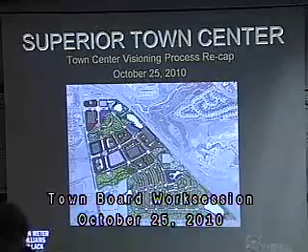I guess I'll be speaking over here to my right. This is where we left off with this master plan and vision, and I'll go through a little bit for the new members, and also a refresher for the existing folks on the board, on how we reached that. Cheney Ferguson originally was my project manager. She's still around, soon to be a new mom, so I'll be losing her for a while, but I'll get her back. So next slide, please.

When we started this vision, we worked with the board to take a very complex subject matter and try to make it simple. Part of that is really identifying overarching principles for the project, things we talk about as must-haves. That became a filter for all of our decision-making when we created alternatives and showed ideas - were we solving these big four principles, basically connectivity, which means are we connecting to the town at large?

Are we connecting where places are disconnected? Connectivity really is talking about ease of movement. Movement, whether you're on foot, in a car, on a bicycle, or on a skateboard - how easy can you move around?

A mix of uses - typically when you're talking about urbanism, you think of mixed use as something vertically integrated. Well, it's not just that. It's actually horizontally integrated, uses that are in close proximity. Proximity is the key point here, that you have different uses you can move among without necessarily having to use the automobile. In other words, you can walk, bicycle, again, the skateboard.

Placemaking - okay, that's the hardest one to get your arms around. But placemaking really is where you create a semblance of an environment that is the town of Superior. When you think of Boulder, you probably think of Pearl Street. There are probably about 4 places in Denver you immediately think of when you talk about placemaking that have unique characteristics of that certain place. What's interesting about Superior, what we discovered, is it has unique placemaking tools, basically because you have such a fabulous view of not just the front range of our mountains, but also further back towards the Indian Peaks, that gives it certain placemaking features.

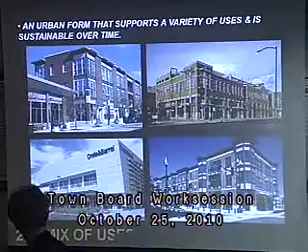Mix of uses, it can be office over retail, like at Stapleton. Or the upper right, you'll see offices that are mixed around a joint parking structure, a joint use parking structure downtown off Pearl Street. The lower right is housing over retail. It's a variety of uses that are coming together in proximity.

So it's more about what we call as urban designers, it's more about the form of a place. I've got to use my hands because I'm not drawing, but you start creating sense of enclosure. You think this is a building, that's a building, there's a street in between. It's that sense of enclosure, and it's not so much about the uses of those buildings, but it's more about the form of how they create those great streets. And that's where you get right back into that placemaking. So these four principles are all actually interrelated all the way through in this type of thinking. Next slide, please.

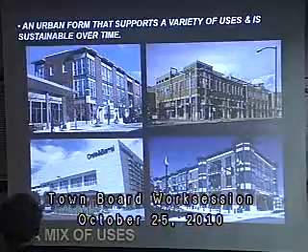Placemaking, we call it dense and compact. You tend to take both those terms as negatives, but that's what brings people together. That's where you get a certain mass of people together that can have interchanges, and those interchanges are social, and they can be economic, and quite honestly, they can be entertainment.

And that's what we have down on Pearl Street again, to use Boulder for example - a critical mass of people that come together just to watch people, and all of a sudden that creates that placemaking. It creates that social network, and it certainly creates an economic formula for the town. The Main Street's going to be a big issue here, and we'll keep talking about that. But it's going to be a main form of creating that place. It's that third place where people can gather.

And what we've heard more in our initial talks was, where do we come together here as a town? Where is our gathering place? Is it the marketplace? Is it your original town? Where does that really come together? And where can you actually do celebrations? Where does somebody out of town say, I'll just meet you there? Where is that there? And we keep hearing, well, we need to create where's the there?

We need to create that place that gets down to the last one about the great streets. And again, when you think about great cities, you always come back to a street - 16th Street Mall in Denver, Pearl Street in Boulder, and we can go on and on. There's always that place that tends to be a gathering spot for a local community. Next slide, please.

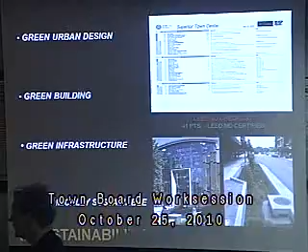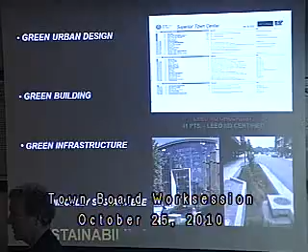All we're doing is this great change of how we build over time, and the industry is picking that up. And it'd be great if it could be more of a carrot to do that, but unfortunately our building industry and our policymaking industry really move slowly, so it takes a bit of a stick. And the stick is requiring LEED buildings. It's a great tool, but I think in about five years it'll be our standard of practice. And what that means is not just about buildings, but really the big piece here is about infrastructure, how we handle water and water quality. Here we are in our high, dry state of Colorado.

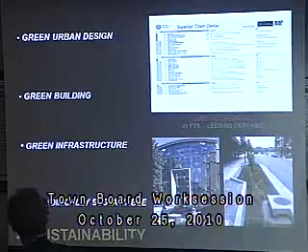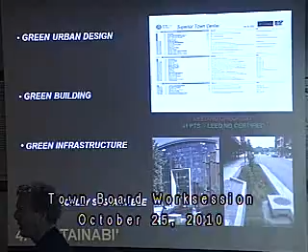What's really germane about this specific site is you have such a wonderful amenity in the creek that passes through the site, and you want to protect that. You want to engage it, because right now it's still a bit of a backwater. But how do you keep it as a great amenity, which gets down to economic sustainability, so the place can transform and transcend over time and still be a viable economic mechanism for the city and to itself.

We'll quickly go through the site process we went through. We've got McCaslin, we've got the local network around there, so we're starting to define the town center site here.

I'm talking about enclosure on a more mega scale. Certainly nobody in their right mind should be walking or trying to cross 36. But there's no reason McCaslin has to be the way it is. We talked about this at length last time.

Part of that is you have the original town. Did I get that right finally? Yes, three years ago I think I stumbled through that for about a year, right? I'm not getting this.

Well, the original town, they should be able to transcend. A pedestrian should be able to walk across McCaslin to whatever economic activity we're putting on the site to the east, and that's of critical importance because that's where you talk about connectivity at all levels. Right now you basically have to stop at a stoplight and wait for it to change.

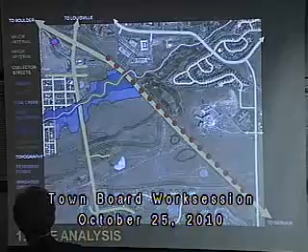Detention ponds, certainly irrigation ditches, and we've got a variety of drainage happening at the site. The site kind of rolls around, so it certainly has characteristics for fine placemaking.

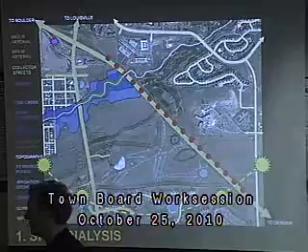Our analysis shows we have the two larger pieces of property. Obviously the creek bisects the north. We have issues with highway visibility—those are actually opportunities with highway visibility.

This is what I mean when you're coming from Denver to Boulder and passing by, there's a wide variety, a great sequence of potential regional placemaking. Again, this could be through significant buildings and view corridors to the mountains, view corridors to open spaces and green spaces on the site. But it's a way of introducing a larger regional activity to the site.

Established neighborhoods surround the site, built over the years. And really a mix of uses—so we talk about mixed use, but this is already around the site on a larger scale, with a wide variety of uses, which is really fascinating.

The thing is they're all disconnected from each other, and not just from each other on the site, but they're also single-use pods. Certainly the marketplace is about retail. You've got retail up here, residential, and all these things are pulled apart from each other. The idea of the town center is to take this series of uses and actually overlay them in the middle.

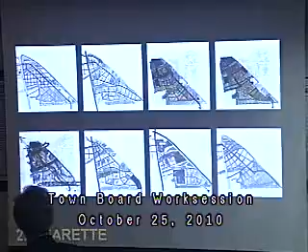So we had a charrette here. We went through a variety of ideas, just some of our thinking, trying to engage all those different principles and arrive at not necessarily a plan, but a thinking that could sustain over time.

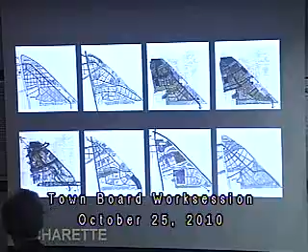Next slide, please. So the concepts are really based on the topography and the mix of uses, concepts of creating various neighborhoods. Certainly a commercial core up here, because of its immediate adjacency to the marketplace. Commercial could be retail, office, hotel, conference center, maybe the ice sheet.

The idea of a green buffer, again we're overlaying Coal Creek on there. So these neighborhoods all buffer away by a certain level of open space or greenness around that.

The urban center we've identified as probably the most mixed-use place. It could certainly hold retail, maybe a little office, but this is where we started introducing maybe a more higher density, more urban residential component. It could be stack flats, condominiums, row houses, townhouses, things like that.

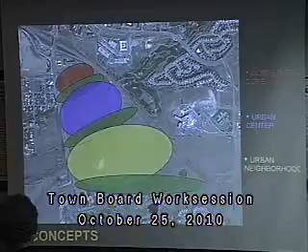Following the ridge here, looking at a green separator, and something we call at the end of this process an urban neighborhood, of a lower scale and lower density. That could be small single-family homes, townhouses, carriage homes, with the exception of maybe a senior housing component over here.

They're really working these three components together. What's going to tie them together is a network of circulation, that could be streets, paths, and things like that.

Next slide, please. Parameters, certainly a dead-on view of Longs Peak. If you've been out on the site, today you may not see it, but tomorrow morning it could be spectacular. It dumped about a foot up there today.

But there's, again, my drive home daily, right on 36, it aligns exactly with it. So it became kind of a form determinant, about this more regional and placemaking capability of the site, of looking at a buffer along the highway. What are we going to put there that could sustain the highway right next to it?

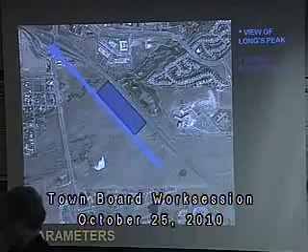What kind of uses? The first thing you'd probably take out is lower density residential. It's not something you'd put adjacent to a highway. You can put higher density there because your construction types change from wood to concrete or steel, which helps quite a bit with noise mitigation and things like that.

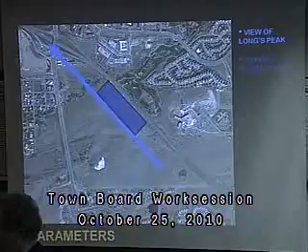Next slide, please. Circulation and traffic through the site, having a few major connectors, a little bit larger streets. We're definitely going to accommodate the car here through some of the major connectors.

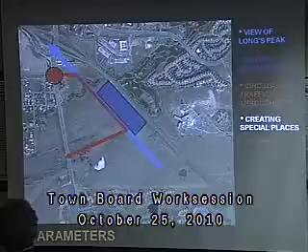Next slide. Creating some special places, basically we talked about this. I'm still struggling with it, the idea of a gateway. Everything's a gateway, but how do you actually create something special when you exit 36? You're coming from Louisville, but there's something here that says you're in Superior now, and there's probably a multitude of ways of doing that.

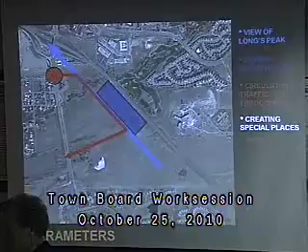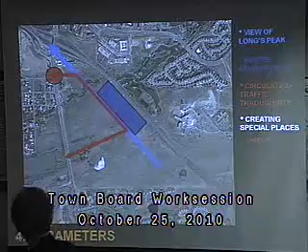But one of the most important ways is being able to accommodate the pedestrian, so you can actually move across this intersection in some manner. So it was kind of demanding some landscape treatment, but we talked about this maybe in conjunction with some traffic calming and placemaking features along McCaslin.

Certainly the great amenity site, Coal Creek here. This is where we talked about this Main Street, and we talked about it in more of the mixed-use village here. Next slide.

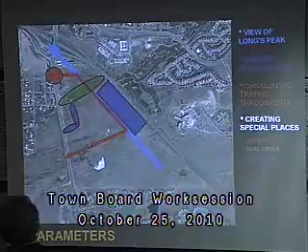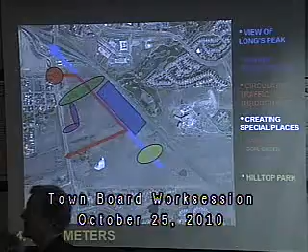Hilltop Park, and then here's the tallest part of the site. Again, it's a meandering landscape, but up here you actually get up above the entire site. So it's kind of like a belvedere where you're able to look out over the original town, certainly all the mountains, but this is a place you could actually look out across the whole thing.

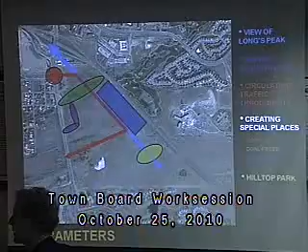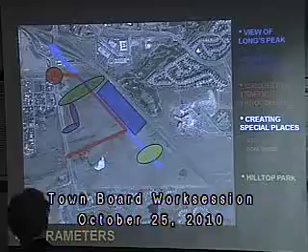And it's probably a place that should be left unbuilt upon, so you can actually use it as a park, more of a public place to view the overall view of Superior. Next slide, please. And then connections to the existing communities, whether streets or paths, that there are second means of egress on the way out.

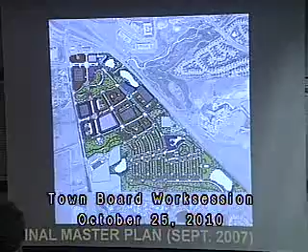I think your point's a good one, and if there is a trail network coming through here, can it be part of that? Can it be part of a larger thing? And then we had a lot of discussion with the lower area.

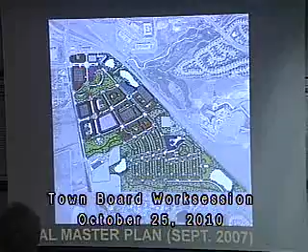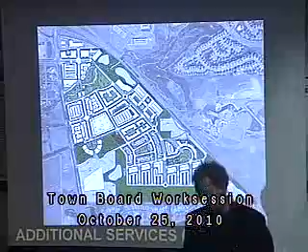I'm going to put that down. But the lower area—we were requested to take a look at the back 40, as we call it. I'm just going to come right up here. We were asked to relook at this piece for a larger commercial component, basically something you call flex office space, which could be light manufacturing or office and things like that.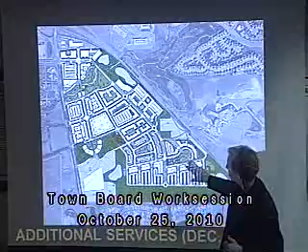There was some angst about the potential of single family here adjacent to this, so we looked at what that would look like. Instead of overlooking single family, you have a fairly high degree of parking down here because you're not really transitioning to development before you hit the larger flex office facility.

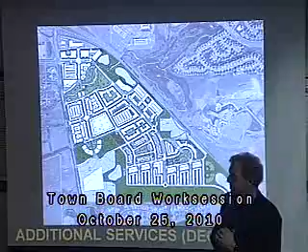Uh-oh. Jane, how do we work this? All right, I'm sorry, I apologize.

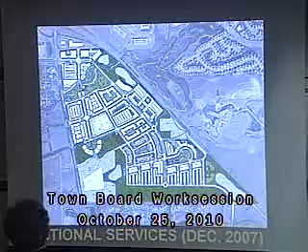No problem, thanks. So it's really about looking at this piece right here to become more of a commercial piece. One of the things we found when doing the initial transportation impacts of what goes where is that when you have an employment piece, you have quite a bit more traffic conditions, more cars coming in and out.

One of the things that's germane about the site is that even though we've planned a nice network throughout, we don't have a lot of ways in and out—a controversial way here, or further down. So we weren't real keen, from a transportation perspective, about the concept of commercial being located down here. Hence, that's where we went with the lower density residential in the first scheme.

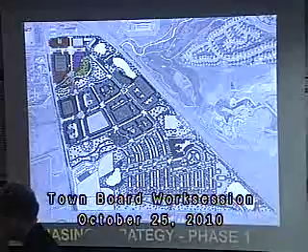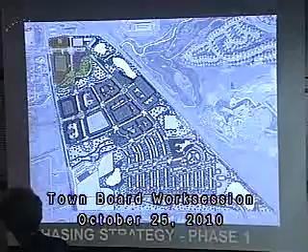So the implementation—next slide. When we look at this as a phasing, this is 2007, things were looking pretty rosy then. There was a lot of activity going on, probably too much activity, a lot that shouldn't have happened. But really, what you've got is building upon successes. With the marketplace right here building, the retail or commercial component comes first.

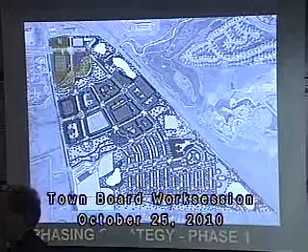So there's two things: it's building on success, but also working on adjacency. All of a sudden we're engaging McCaslin, creating that placemaking, taming it, allowing pedestrian orientation to come across here. Because you're building on successes, a multiplicity of things happen—maybe get the bridge in here and find another way coming back out.

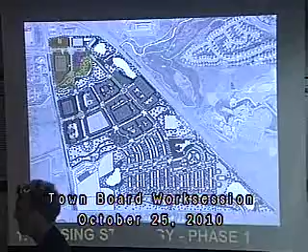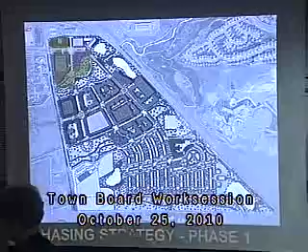So you start setting a pattern for future development to come in. Very rarely will you have a plan like that where one developer is going to build this. You tend to find people that do commercial very well—that's broken in two, there's office guys and there's retail guys. The more difficult part is the mixed-use piece; there's not a lot of people that actually mix uses.

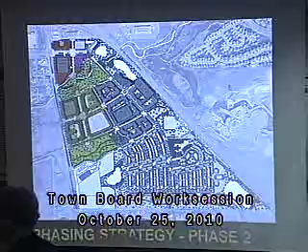I think that's all changing now with the shaking out of our real estate industry. In the near future, people may be more apt to take on these things under different lending conditions. Part of this was building on the success of putting in the pedestrian bridge.

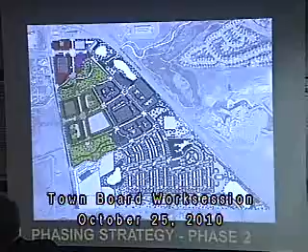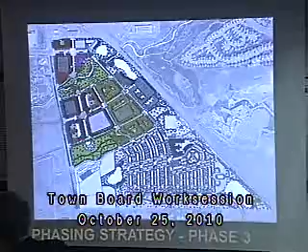So now we're building complete neighborhoods—this neighborhood with the main street that's married with the commercial neighborhood. Next phase, please. Then building out this neighborhood that's built on the success of this. So now you have a whole neighborhood that's complete.

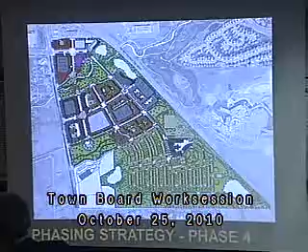Next slide, please. Then coming back down and building out the lower density neighborhood down here. So we're constantly extending the street network, the infrastructure, and all the things—they all start building upon each other.

Back to—and the last piece being this, which is wide open as to what that wants to be, whether it's a mid-rise office component or a mid-rise housing component. It's probably one of the last things to come in because of its adjacency to 36, but also because if it's one of the higher intensity uses, it's building upon the successes of the various real estate components that come before it.

Next slide, please. And there's Long's right there. This is, just as a general massing exercise, looking over the whole thing from the Belvedere, really moving from one and two story to two and three story to probably four story here, with a larger scale of buildings adjacent to 36. So why don't we go back to the plan and then open it up to discussion for you guys.

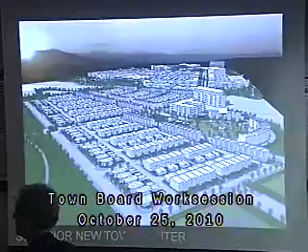Let me ask you one question. So you obviously have noted that things have changed over the course of the last three years. When you've looked at this, do you have, from your perspective, things that you think might need to change?

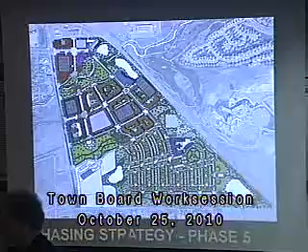The other thing we talked about is the hardest thing to make successful is the retail component of it. From the time of completion of the plan and talking with multiple interested people on the project, and just general knowledge we gained, the residential seems to be a very strong component. When there is lending again, that's probably one of the very first things that will go. The retail may be the last.

We talked about the Highway 36 corridor. Another project we're working on, the Westminster Mall, we're looking at 1 million square feet someday there. The corridor is getting over-retailed. So it may be asking a lot, not necessarily for this component, but the Main Street component, which is really one of the key must-haves. So I think we need to look harder at what that could be, and maybe let it transform over time.

When I say transform, maybe that ground floor use can initially be residential as long as it's designed for future transition to commercial. It'll acquire a patina over time, until it really wants to be that. So I think flexibility is key. I know there was a group that wanted to start here right away, but how do you start down here when you've got a fairly amazing infrastructure to get you back out? Those are tough issues here.

So, yes ma'am, when you finish your thought. Oh, you'll instigate a new thought in me, so go ahead.

I think we're very strategically situated between Boulder and Denver. Yes, and I do believe that transit, as part of this whole entity, is very important as a delivery mechanism to Boulder and a delivery mechanism to Denver. And I'm a little troubled that our RTD facilities are actually up here rather than integrated as part of this complex. So I would like your thoughts on that piece.

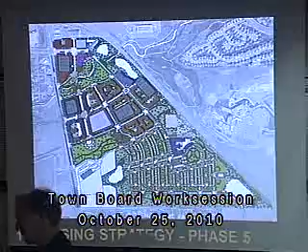Unlike if this was a grid of your typical half mile or an arterial, I think you could entertain those discussions. But it's a disconnected piece, so it's a tough discussion. But I don't think it's impossible to encourage. I think we're changing that half-mile radius, it came to about right here, is that correct? So what we believe, and I really truly believe this for Coloradoans, the half-mile radius - you always talk about a 5-minute walking radius, which tends to be a quarter mile from transit. Most people will walk a half-mile if it's pleasant.

So we can walk all day in here because we know we can make it pleasant. The key is this connection right through here or right across here and coming on up. That's why we put that as the opportunity place right here, because somehow we have to make that comfortable and lively. It's not an impossible task, but it's not in the middle of your site. So I struggle if I would call this transit-oriented development, but I think you can capture a majority of the population activity of the site that could have the option of using that bus facility if it was pedestrianized.

The four design principles, it seems like they would make up the identity of our town. When you designed this, was there a specific identity in mind? And how do you see this town being viewed if this were complete?

That's a great question. I go back to two key pieces of being viewed, kind of from an outsider coming in. One is we talked about what it looks like since a majority of people traveling to the site here, at least to the marketplace, are coming by car. At this point, there's a way of placemaking or wayfinding there.

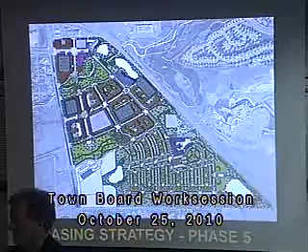I've lived a number of places, and the town of Superior actually, I believe, has just such a great history. A lot of—I live in Rock Creek, it's a bedroom community, and one bedroom community is like another—but they're not all situated next to this historic place called the town of Superior with its historic coal mines, etc. So as we look towards visioning for ourselves and how we want to capitalize on our past to create our future, I think that offers some intriguing possibilities.

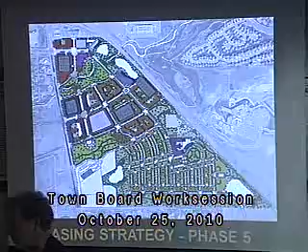Any thought given to tying those together? Yeah, there was, if I'm correct, a really passionate person from the city who sat with us and made sure we kept that in sight. That was the genesis of a lot of this development here, which could connect on to some of these more regional trail connections and all that.

And again, we talked about signage and place markers and benches where you could actually learn about some of the history. So the idea of bringing that through and maybe up to the cemetery, I think, is really kind of a neat idea too. It's something that I think could be easily incorporated.

But obviously, we never got to that kind of detail. This was kind of an overall vision plan, and we talked about setting a series of design guidelines at one time as a critical next step for the project. When you have folks coming in, there's a great amount of predictability, both from the private market side who may be investing, but also from the public side—that they're actually implementing what is written, or the intent. Part of that may be the whole programming of the more cultural and historical sequences I think you're alluding to.

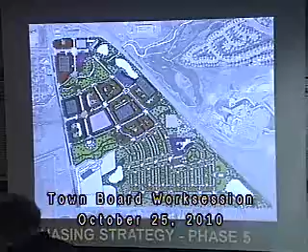One of the more difficult things I wrestle with, not just with this concept but any development, is the already somewhat vexing traffic problem we have with our interchange of 36 and coming up and down McCaslin. Tying that in with the concept of taming McCaslin, I really think that's going to be a real challenge.

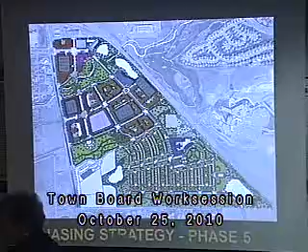To not have ourselves in gridlock, I don't know if you have any thoughts about that. Just personal thoughts - I've ridden my bike up through here and discovered quite a bit more. I had no problem coming from my meeting in Arvada and driving at whatever speed I wanted to McCaslin. It's built for speed. There's no reason you have to drive 65 miles an hour when it's posted 45. I haven't seen it myself, I hear about it, but I haven't seen it.

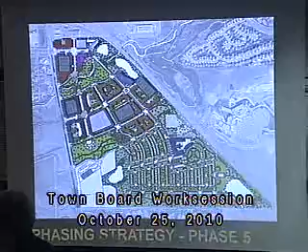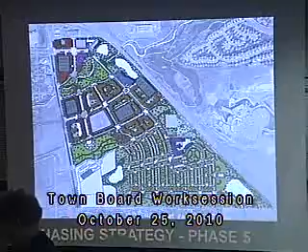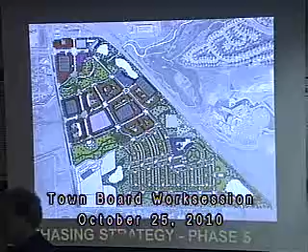Those are difficult choices that I think any place has to make, what they want to prioritize. I don't mean to say that cars are bad, because they're actually quite good if utilized properly. The thing is, how do we make pedestrians, bicycles, and cars equal partners? Right now all the standards, and certainly your standards, are unequal - it's all about the car. So it's not bringing one down, it's bringing the other one up.

I think what you'll find, especially if you do have infill housing and placemaking capacity, is people moving around just fine, because it'll be a choice network. If it does get congested, bicycling or walking will become a prevalent activity, as it is in most fine cities. So there are choices - there may be a level of service reduction in one, but a tremendous level of service increase in the other. Most places struggle with that because they have to change some codes or standards.

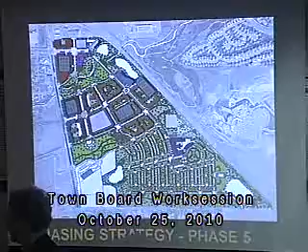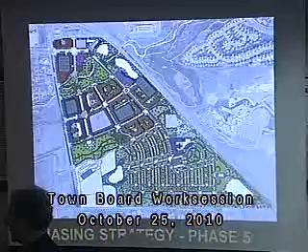Professionally that's my view, but personally, you can drive very fast in McCaslin - I know you can - but until you get to the interchange... Well, yeah, it is. We don't have great connectivity in the area. That's a drawback, there's no doubt about it. But it's also a phenomenal piece of property in Boulder County, so it has some really good things going with it too.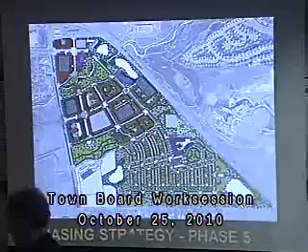Other thoughts from the board?

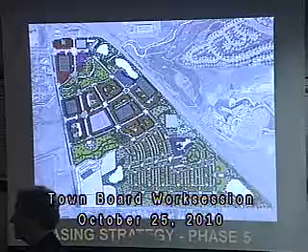Well, thank you very much for an excellent presentation, as always. Thank you. Now if you could just go out and build that would be fantastic. We'd love to - it's a strange time. Again, it's the private industry that's going to change. What's nice, you don't catch me saying this too often, but what's nice is I think as a board, or as a town, you do have the flexibility of being patient to get it right.

And that's actually a blessing at this time, because I think our industry is retooling. What's going to get built here in 2015, 2012, whenever, is going to be a lot better than what got built here in 2008. It was in a hyper build mode when we were planning this in 2006, 2007, and we weren't building well, quite honestly. But we've learned so much because we were able to slow down - I'm talking industry wide. So I think it's an enviable position if patience can win out, because you'll find better players that create better buildings in a better place.

So, very good, thank you. Thank you so much, appreciate it.

All right, that brings us to the review of the agenda items.

For the November 8th meeting, right now we have the minutes, the final reading of the ordinance for vendor fees, which is Chapter 4 of the code. We have our public hearing on the 2011 budget, the public hearing on the Clearwire Wireless final plat site plan and their lease agreement. We've got the Chapter 16 Land Use Code scheduled, although things are getting a little crowded on the 8th, so we may or may not have that. We've also got the Fourth Amendment to the Calmonte Subdivision Improvement Agreement for Caslon Street.

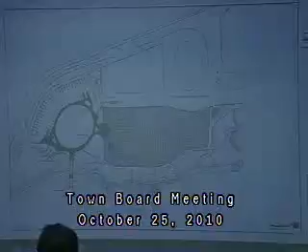The top access point that goes into the landscape drop-off yard right here. And then just to the south, we said, well, we know we're in this range, so what can we lay out? Just to the south of this access point is a ditch that comes across.

From the beginning of this, we wanted it to be as cost-effective as possible. So instead of altering the drainage down there, having to put in culverts and a number of additional items, we fit that range of parking in here. At one point in the interim, we were looking at only doing a small portion of it, maybe 10 spaces. We also have to consider this parking is not just for a 1 or 1.2 or 1.4 acre dog park.

It's for people going in, using Frisbee golf with the 9-hole disc golf course, and also an acre for the bike skills course. The other thing we need to layer in here is all these uses, dog park, Frisbee golf, and the bike skills course.

It's not just a neighborhood use. We're going to be attracting people. It's more regionally oriented for some of this. People are willing to travel to use some of these facilities. So it's not just a small neighborhood tot lot or whatever.

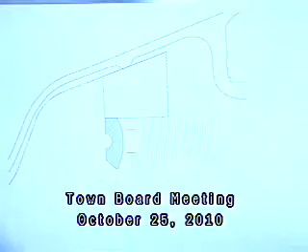I think we also have to take into account, I am certainly an advocate, I'll disclose, public disclosure, I'm an advocate of doing it right the first time and making sure we've got ample parking. I don't think we have the luxury of accommodating parking on Honey Creek or on Enterprise. We're unloading dogs, and we may be unloading bikes. People may come with bikes on the back, and we're unloading dogs, which takes, I prefer a little more ample parking stalls so that you don't ding my car doors. So I do want to take that into account.

But what I wanted the other visual up there for, was that done to scale as best you could? Yes, it is to scale. Well, what I saw was with 44 spots up there, the parking lot was a little blip in the overall image of that whole park, and I think that was relevant to call out. I don't think that given the size of the full park itself, that we're going to have an asphalt jungle up there. It's going to be a contained area, and once we get that back up, everybody can see the proportion of the parking area to the entire park, and I think it is just a really small part of it.

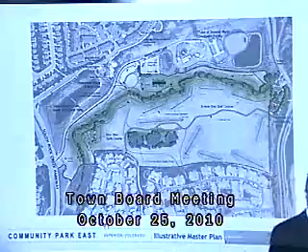Not the pond, I mean the area that within the dog park that cordons off the pond that they have. What is that size, do we know? Okay, if I'm being told it's about a little bit over 1 acre without the pond. Without the pond, it's a little over an acre. Okay, all right.

Go ahead, I'll have more questions like that. Trustee Gomez?

I'd asked about and been told there were bike racks. Can you show me where those are? I'd asked about and was told there were bike racks when I asked people on PROST. Can you tell me, I just couldn't find them on the map. Are they right next to parking or something? Did you... I can't find it. It's included. Okay, Trustee Hanson?

The discussion about 30 feet from the center came up again, because that's always been PROST's position, that they've always wanted 30 feet from the center. The only reason they approved 50 feet from the center at one point was because they thought those were the only two options they had, 50 feet from the center or 50 feet from the bank. But their position has always been 30 feet from center, because we know from expert recommendation that you need at least 1 1/4 acres for this park to be successful. Right now, 50 feet from center leaves us at 1.2 acres, so we're below that.

Much of the conversation tonight is about maintenance and rotating. If we have worn areas, well, the smaller we make this, the more we're going to have wear and tear in certain areas, so we might as well make it bigger. One of the other issues that came up in the past is drainage. We know drainage is going away from the creek, so there's no negative impact on drainage into the creek. So why not go 30 feet from the center?

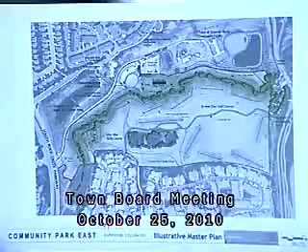Trustee Skumatz has given the same information, that it's not just about worrying about contamination in the creek, it's also protecting a wildlife corridor that was meant to be a wildlife corridor, and now we are putting people, dogs, bikes and golf in an area that was never meant to be this. So I've given my points, and I hope we can steer this in the right direction and save this overall.

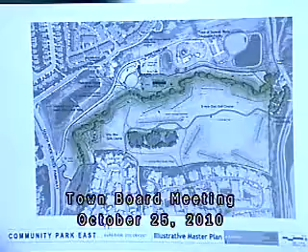But I'm not liking what I see right now, because I don't think we have our ducks in a row. I don't think we are ready to approve things at this point.

Other questions from the board? Trustee Gregorus? I just have a couple of comments to make. It's interesting sitting up here on the board to have such divergent opinions about the very same thing.

Looking at the map, Jim Payne and I walked through most of the park today, including exactly where 30 feet from the center is, and believe me, there's plenty of room. It will actually maintain its open space feeling. It's such a wonderful park. I don't see it being inundated - it's not going to be like Times Square where we have 10,000 people there at a time.

It has 3 different amenities. Our town needs it, and even though it may not be presented as a regional draw, I think word of mouth will certainly bring other people from surrounding communities to it. I really don't feel like this has been piecemeal either. I think we've talked about this as a whole. Yes, the disc golf happened a little bit earlier than we had anticipated, but it looks great.

I think the couple of issues we're talking about are 30 versus 50 feet, and the parking lot - whether we have it from the very beginning created the way it's being presented right now, or have it a little bit smaller and add to it later on. For the most part, this process has been as transparent as you can possibly have. We've talked about it and opened it up for months and months. I've gotten tremendous feedback from PROST and from citizens, so I'm very comfortable with it, and I'm ready to vote for it after we hear some public comments.

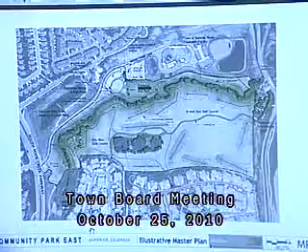But if you go out and look at it visually—and I know you have, and I respect your aesthetic opinion on what you're trying to achieve, Trustee Williams—you'll see that it's, I think, and PROSTAC thinks, a very reasonable distance. Any distance you would add to the bank or to the distance from the creek would be less valuable to the town and to residents and users than the additional acreage it would add to the park.

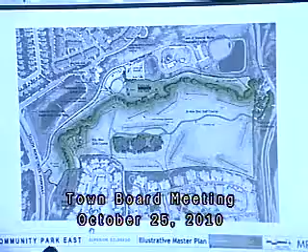So I would ask you to consider that, and I appreciate everybody who has come tonight. Thank you. I'm going to ask everybody—thank you for addressing that particular issue. The other one that people should weigh in on is the grass versus the gravel. I don't know if you have a thought about that.

As you know, we had a booth at Chili Fest, PROSTAC did, and I probably talked to 60 or 70 people. Other than a couple of people, it was overwhelmingly positive for all of these amenities. I mean, not just 'yeah, it's nice,' but excitement.

I asked everyone I knew if they had a dog, and I asked everybody who had a dog about grass versus gravel. There was nobody who preferred gravel over grass. Now, I'm not saying—I've met some people who have—but no one that I asked, which may have been 30 or so people.

But what's clear is some people, what they don't want is mud—they want a nice surface. There are some people who say, well, if you're not going to keep up the grass, I'd rather have gravel. But whether you don't keep up the gravel or the grass, either way you're going to have mud. There are people who indicated that when it's raining, they like some area that's not grass, so they don't have to go out in the wet grass, either themselves or the dog. So they like the idea of having a transitional area that's gravel.